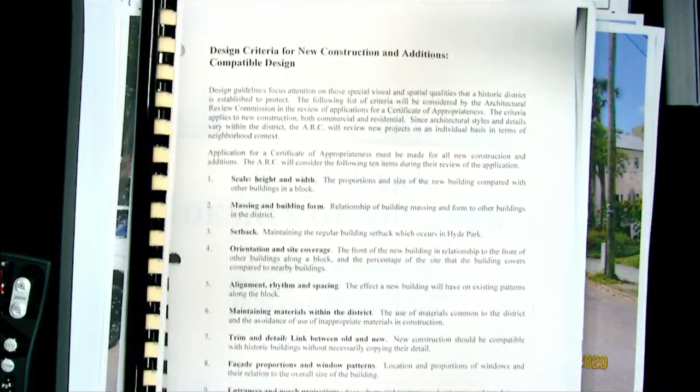These are the criteria for compatible design also. There are 10 criteria here, and these are also reflected in your staff report. The agent, in working with staff, will go through each of these items this evening. At this time, I'll delegate it to the agent.

Good evening. My name is John Keener with Keener Architecture. I'm the agent this evening, acting on behalf of the owners. We are presenting a case for a redesigned certificate of appropriateness for the house at 1103 South Rome.

Thank you for your time this evening. The house that we are presenting to you is a contemporary style. What we hope to demonstrate in the presentation this evening is that we do meet the criteria of the Hyde Park design guidelines.

We took the design that was denied with the variances, and we tucked and pulled and redesigned the front facade so that we could comply with all of the zoning criteria, so we're not requesting any variances this evening. One of the major changes from the previous design that you guys saw in June is that we took away the porte-cochere and we redesigned the front roof.

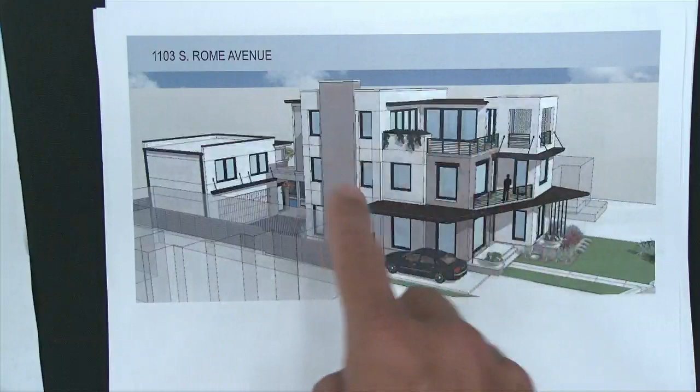Coming to the south, so you're looking towards the north. It is a 3-story structure in places, but it steps up from the street into the larger massing inward on the site.

This is looking at the south elevation. This is a view of the two-story accessory structure in the rear. It's not 2-story as far as actual living level, it's just a 2-story volume, so we can use it for storage and vehicular parking.

This is looking towards the southern, or looking to the south, of the northern elevations. Again, the northeast corner, in the front of the home. Again, a lower human view from the street, and then looking directly at the house from the front.

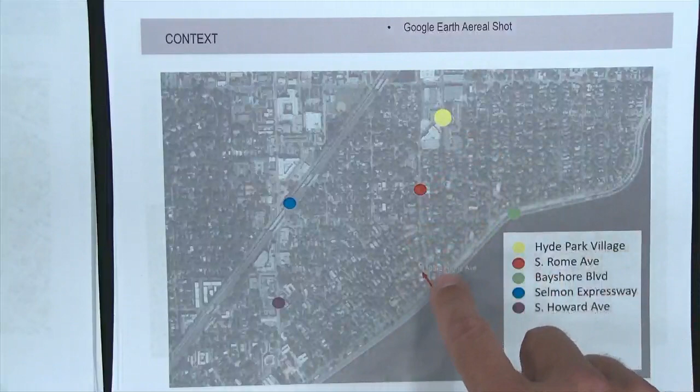As Ron had pointed out, the site is located along Rome Avenue. According to the Sanborn map, there are no contributing structures to the property, as well as to the property to the north and south. Just for context, our property is located closer to Bayshore Boulevard. Hyde Park Village is to the north, along Rome Avenue, near the Selmon Expressway and South Howard Avenue.

Looking towards Bayshore from the center of Rome in front of our house, and looking north towards Hyde Park Village.

The property to the north of us is a non-contributing ranch house with about a 35-foot front setback because of the large tree in front. The remainder of the homes along Rome Avenue have a 25-foot front setback. Our new design now has a 25-foot front setback, so we're observing that standard.

This is the property to the south. It's a postmodern style, approved, as Ron said, in 2000.

This is a newer construction, just completed at the beginning of this year at 1107 South Rome. This was presented as a contemporary design. Things to note are that it has plinths that project out in front of the 25-foot front setback for a front porch, as well as the 3-story element along Rome Avenue.

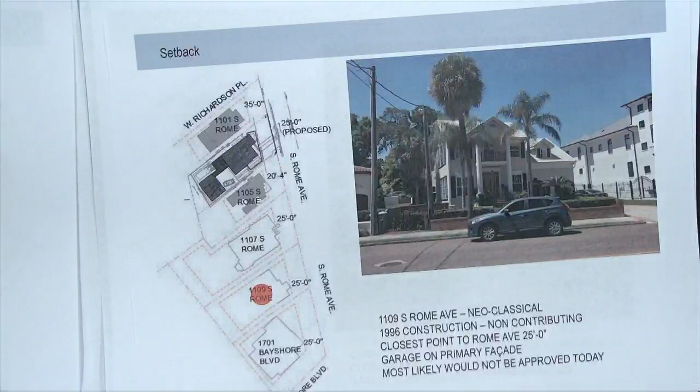To the south of that, at 1109 South Rome, there's a neoclassical, newer construction with a front-facing garage. Then along Bayshore Boulevard and Rome Avenue, there's a large Mediterranean Revival style home, which also has a 3-story volume on the front facade.

The purpose of presenting those to you is not only to show a variety of home styles along Rome Avenue, but also to reinforce that there is a larger scale along Rome Avenue. I think the homes and the massing tend to grow a bit. It's not the traditional bungalow street of Hyde Park. Rome Avenue, starting with Hyde Park Village, has modern style, very traditional styles, and newer construction—it's not the typical street frontage.

One of the important things when addressing scale and massing is to look at that facade. Starting at the corner of Hills and Rome Avenue, there's a relatively newer construction, 4-story multifamily project. Across the street, on 1011 South Rome, there's a 2.5-story structure.

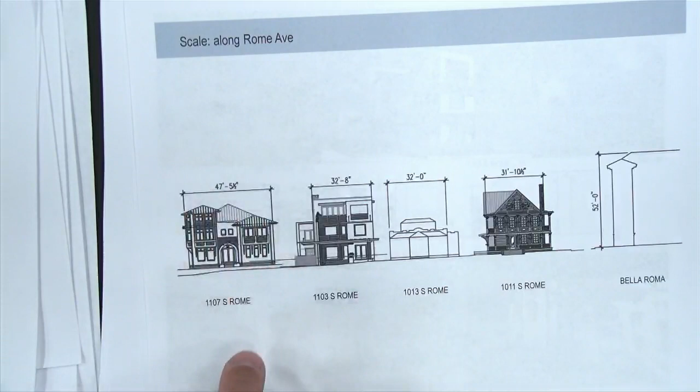It's a Victorian-style structure. To the south of that is a one-story Mediterranean Revival style—well, actually two-story, but one story in the front. The project we're proposing today has a three-story massing in the front, but is a two-story mass that steps back to the three-story. 1107 South Rome is a large new construction with three-story massing in the front.

I thought this is one of the more important slides to show that context together. It really helps emphasize that there's a variation of styles and sort of an eclectic nature of architecture along Rome, as well as fairly tall massing.

Here are some examples that have been approved in Hyde Park of other contemporary construction. These are all newer, within the last 20 years, but show a very similar style that has been approved in the past. I think they enhance the neighborhood—I don't think they take anything away from the style of homes traditionally found in Hyde Park.

Albeit this is a commercial structure in Hyde Park, it has a similar style to what we're presenting—clean white stucco, metal detailing, and taller volumes addressing the street. Hyde Park Village, north on Rome Avenue, really sets the tone for contemporary style. This has all been renovated fairly recently, and I think it shows that contemporary construction is compatible with the fabric of Hyde Park.

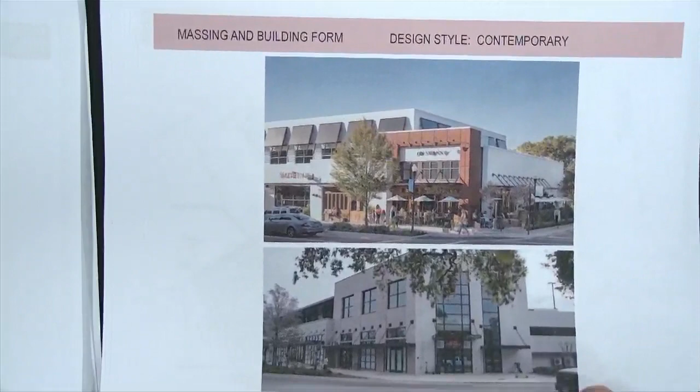More specifically to our site, we did request a design exception earlier in the year for a 1-foot side setback reduction on the north facade. The purpose of that request was to push the house to the north in order to allow enough room for a drive aisle to the rear detached accessory structure.

We're proposing an attached, open covered walkway between the garage and the rear porch to provide shelter during rainstorms—summer rains are tough to deal with if you have groceries. We have a ribbon drive that comes in with a concrete apron and small landing spot, then continues into a rear motor court that enters the 2-car garage.

The first floor plan has a ribbon drive and a smaller front porch than we presented at the last case, but we were very cognizant to make sure that we weren't asking for any variances.

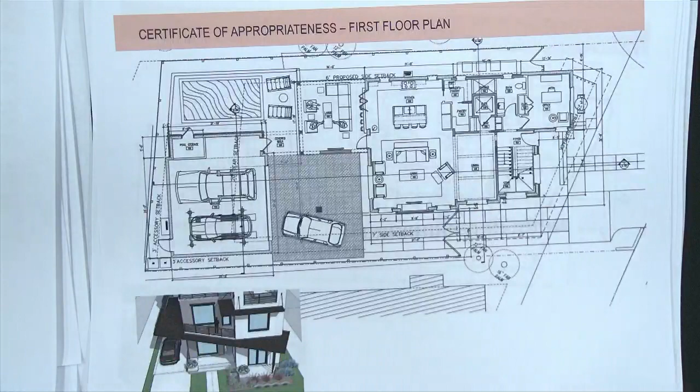We were also very adamant to respect this line, which shows the 20-foot building platted setback line that was discussed heavily at the variance meeting. We're well off of that line, so we're not encroaching with any roof overhangs or anything. Just wanted to make sure that was clear.

The second floor has a new metal canopy that extends out as a roof overhang. We have a small Juliet-style balcony off the bedroom, but that's really just a smaller landing spot than what we showed in the previous design.

The third floor is split between the master suite and some roof terraces. We have a covered portion towards the front that is a 3-story mass, but the remainder of the third floor is terrace and master suite.

This is a roof plan. We're showing a mixture of low-slope metal roofing as well as a membrane roof system. The front porch on the terrace level will have a low-slope membrane roof, stepping down to a metal low-slope roof. Then we have a parapet-style construction with a membrane roof, and on the rear portion a hip-style low-slope roof. On the garage, similarly, a parapet style with membrane roofing and a pitched metal roof.

The front and rear elevations are easier to read in 3 dimensions, which is why I presented that first. You can see the massing shows an average site grade of 8.5 feet, averaged between a higher grade in the rear of almost 10 feet 8 inches, to closer to 6.5 feet at the street. So we average it out to about 8.5 feet for an average grade.

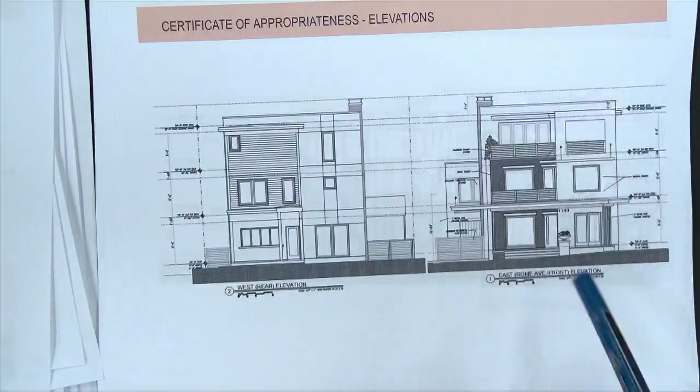As shown, the top of our roof, the roof deck, is at the 35-foot buildable maximum level. It steps down in some areas, and we have a parapet wall feature that extends beyond that by 18 inches. That's considered an architectural feature, just to give a variation of mass. So the actual top of roof meets the zoning criteria, and architectural features are allowed to go beyond that up to 40 feet.

In our case, as the property slopes towards the rear, it benefits us — the massing of our project actually comes down. So at the front we're meeting the 35-foot criteria, and as it goes to the rear we're actually slightly lower than 35 feet if measured from grade.

This is the north elevation. We're showing a mixture of materials. On the accessory structure, we're at the 22.5-foot height limit approved in design exception 1. We have a brick facade, which we'll show examples of as the presentation goes on, Hardie board siding with a 6-inch exposure and smooth finish, and again a low-slope aluminum roofing.

This element has Hardie board siding, and we're going to do a smooth stucco. Some of these lines show control joints with an aluminum window system, and again a brick facade that steps in. We'll have our mechanical units on a plinth below at the flood elevation, but behind the fence — we'll show that further on in the presentation. This will be a stucco element as well, with an architectural screen block, which we'll show examples of as the presentation continues.

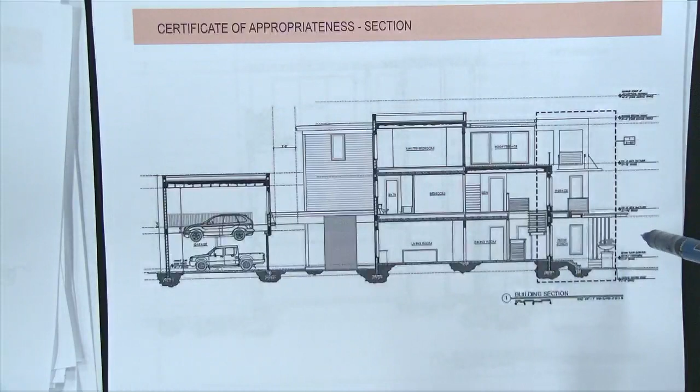This is a section showing how the massing steps from the front facade. We have a 3-story element, then the roof terrace, and the larger 3-story massing towards the rear. This is a cross section cut through that secondary massing.

It's through the roof element here and the planter. So it shows the extension of the metal canopy to the side, the brick elements, the planter, and the roof terrace.

This is the section cut through the accessory structure, showing the storage loft and then the vehicular lift.

We were requested to present a water table detail when we worked with staff. This is the two different conditions of where we have a water table line at the first floor level. Where we have stucco shown, we're going to do a 1-inch reglet detail to provide a reveal. And then where we have brick that continues down to the grade, we're going to do a 1/2-inch step out of the brick to achieve the line at the water table.

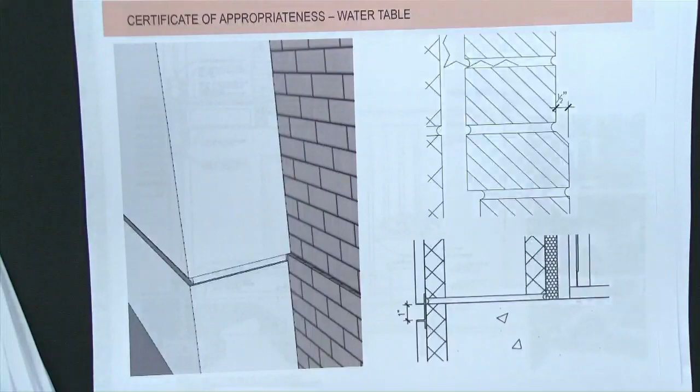This is a section through the front porch. We're showing a 22.5-inch step up from the sidewalk to the front porch, and then a 4-inch step up into the house. This also shows the relationship of the small balcony on the second floor to the metal canopy that extends out over the front porch.

Beyond, we are showing some 3-inch metal steel pipes. Again, we'll address that as the presentation continues.

This is a section cut through the third floor terrace showing the metal railing detail, how we're addressing the brick and the stone. Above all of the details where we have a brick condition, over the windows we're providing a metal channel that will be painted bronze to match the windows, and that channel will support the structure instead of doing header brick.

Typical details through the accessory structure roof conditions, where we have a parapet wall that goes down to a low slope metal roof. We're showing a membrane roof that slopes to the side, and then the metal roof at the parapet condition, and then here's the roof overhang detail at the accessory structure.

We're going to do a beadboard soffit, an aluminum wrapped fascia, and a low slope metal roof with an 18-inch overhang. We're also showing aluminum gutters on the roof that will tie into aluminum downspouts.

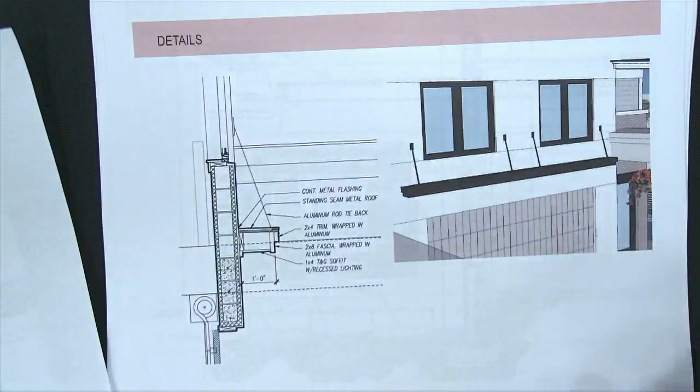How am I doing on time? Is there a time? Do we know? 12 minutes left? Thank you.

This is a section through the side canopy structure. We're showing a vehicular gate, the ribbon driveway, part of our drainage system, and then this is part of the stucco wall. We're also doing a tongue and groove beadboard soffit underneath the metal canopy.

Section cut through the planter detail on the third floor terrace.

This is a section showing how we're addressing the relationship of the condensing units on the north side. We're just building a metal plinth, and then we're also doing a 6-foot wood fence that has 1x4s horizontally screwed into the 4x4 framing members. So at no point from the front or north side will you see the condensing units from the street.

This is a typical roof overhang in the areas where we do have a low slope metal roof, 18 inches with a gutter and a 2x8 fascia clad in aluminum. At areas where we have brick, we're going to do a precast sill piece around the windowsill.

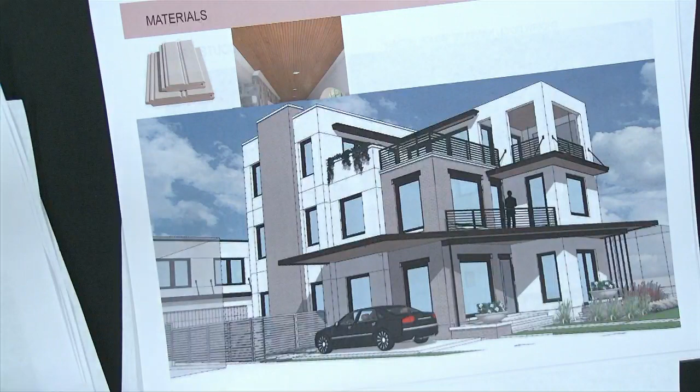This is an example of a similar color that we're proposing. It's going to be a lighter stained wood.

This is an example of the brick and the stucco that we're proposing. The stucco will be a white, smooth painted stucco. And then we're going to do a Roman style brick. We're still trying to narrow down the exact color, but we're proposing, I have an example.

We're proposing a beige tone.

Do I show this on the projector or just hold it up? It'll be fine. Okay.

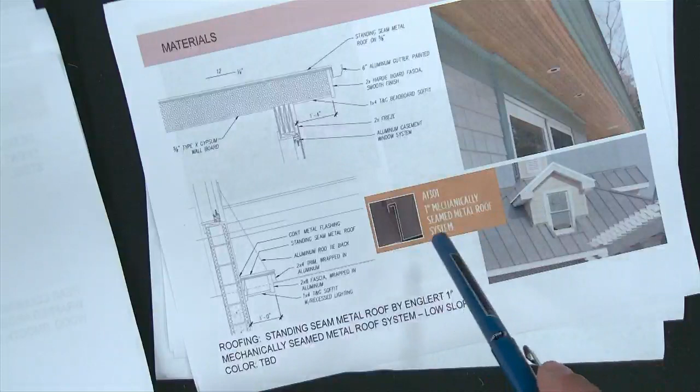I mentioned some of the roof elements. Where we have the standing seam metal roof, we're going to do a 1-inch mechanically seamed roofing system that's allowed to be put on a low slope. And what we're showing here is also just how those metal elements and the wood kind of come together.

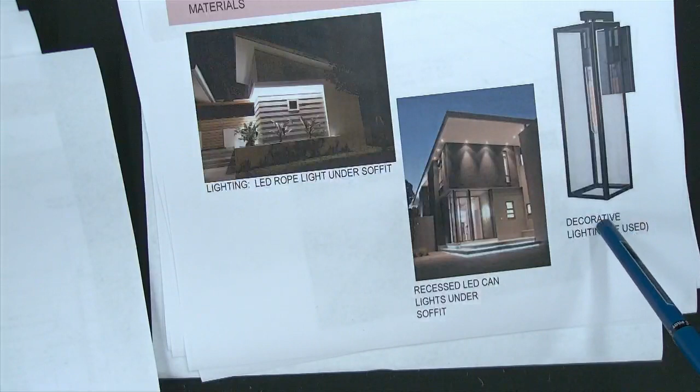For lighting, ideally we're not going to have any light fixtures on this house. If we do, it will be in this nature. Most of our exterior lighting will be via LED rope lighting or can lights, so we probably are not going to have any mounted fixtures, but we wanted to show an example of what it would look like if we do.

Example, again, of a detail through our roof system, and then just an example of a low slope membrane type of roof that we're proposing.

For windows, we're proposing to use an aluminum window system, very contemporary, by ES Windows. I think this one's a little too large to put in the projector, but it's a very clean aluminum style window. This is a smaller cut section through a casement piece. The majority of our windows will be casement or fixed.

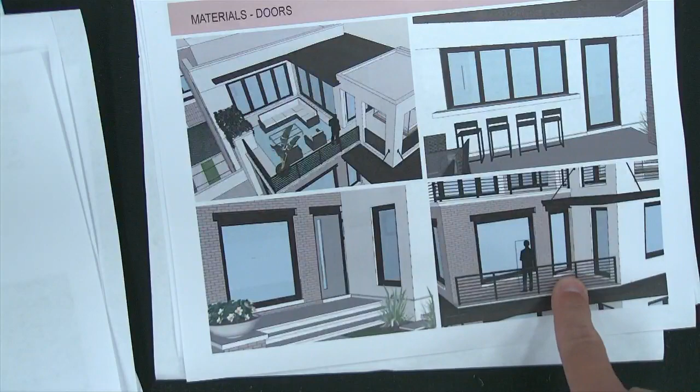For doors, we're showing a bifold door system in some areas. On the front door, we're doing a steel door, and in other areas we're just doing a French aluminum door system. These are areas where we're going to have doors on the front terrace, coming out of the kitchen to the rear lanai, the front door, and one little man door, a French door on the 2nd floor balcony - one coming out from both areas.

Our railings are going to be a very simple black aluminum. We're going to do a very thin flat stock metal, and it's going to be painted bronze to match the windows and other trim.

For the garage doors, we're going to do a clad wood, stained similar to the other trim, very light colored stain.

Mentioned earlier, we're doing a mixture of horizontal siding, brick, and stucco. In areas where we're doing the siding, it's going to be a Hardie 6-inch exposure with the smooth finish. Just an example of other contemporary architecture that has that style. This is a house around the corner, new construction, obviously traditional style, but it has smooth 6-inch exposure Hardie as well.

The front of Rome Avenue, many of the newer houses, a lot of the older houses have a retaining wall. We're going to propose up to a 12-inch high retaining wall along the sidewalk. I say up to 12 because that's going to be the highest point - it sort of slopes with the grade along Rome.

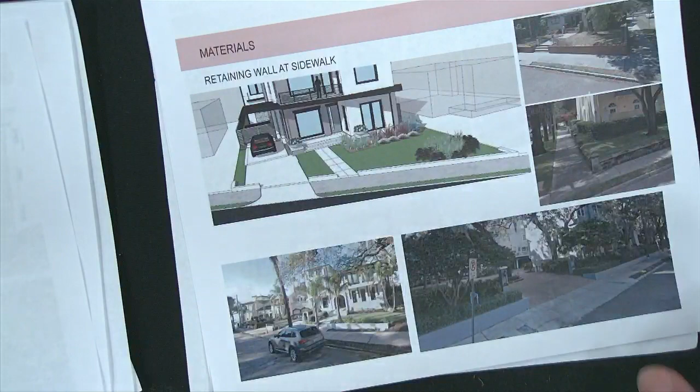We're still working, and as we get final construction drawings done, our intent is to keep it a rather low retaining wall, less than 12 inches, but we need to work with staff as that develops and we get our final grading plan complete, if that's approved. Again, this is just showing examples along Rome Avenue of retaining walls.

Our motor court, we're using turf block to help with the impervious surfaces, and also because it adds more green space, more play area. As mentioned earlier regarding the retention plan, we are draining all of our gutters into a downspout system that's carried out towards bubbler boxes on the street, so drainage is accounted for in all areas. And again, this is the front of our house as proposed.

We really appreciate your time this evening. We've worked hard with staff to try and present something that we hope can get approved and considered this evening. It's been a long journey for us - we started this application process in January, so we're really hoping for positive feedback this evening and some consideration, and we'd love to work with you and hear what you have to say.

Thank you. At this point, staff's going to present the staff report.

Good evening, Commissioners. Ron Vila, staff with Historic Preservation. Staff finds that this is consistent with the Hyde Park design guidelines. Initially, we started with the owners and the architect for him to define the style of architecture, and then once he defines the style, to stay within that vocabulary and move forward.

It's a very complete presentation this evening. And he addressed the items in your staff report on page 3, which deal with the scale and the massing, and for compatible new construction within the Hyde Park Historic District.

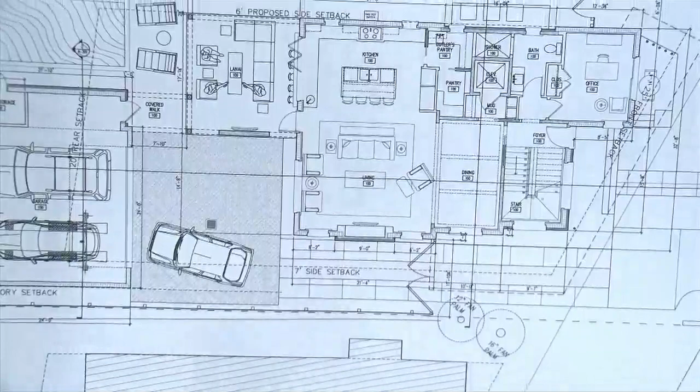So forgive my printing, but that's the line showing the separation between the two, and it's actually 5 foot 0.5 inches. So that's what we're doing to maintain the separation requirement. Cutting through here, this is a portion where we're going to have the membrane roof. You see it here and here. It's just an open connection, really just a roof and a beam that matches the rest of the lanai.

Okay, thank you. Other concerns - refresh my memory, I think the fence was brought up. Yeah, the fence, I believe you described it, but I don't think we saw a picture of it.

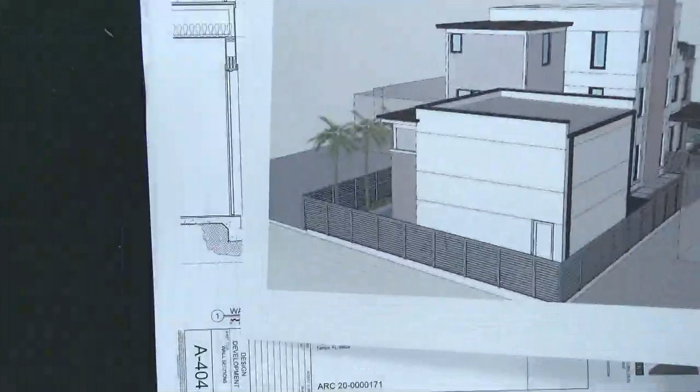So this is a typical section. We're going to do a 6-foot high wood fence. It's going to have a cap across the entire length, and then 1x4 horizontal slats with a 1-inch space between them. The model doesn't fully represent the detail, but it's very similar in nature to what we're showing on the model.

Okay, thank you. What were the other concerns? The last thing was the front walkway. I'm going to again reference the wall section through the front. So we're doing a concrete sidewalk from the existing sidewalk to the front porch that slopes slightly up. We're going to do covered concrete steps and an exposed concrete finish on the front porch, as well as the small porch off of the front office.

The majority of that front porch is clad with brick. In front of the office there are stucco details, so I think the question was how does the material engage the rest of the facade. So it's concrete transitioning into brick. Thank you.

So, on the graphic for the fence and the gate, they both kind of look like they're metal, but you're saying they're wood? Yeah, it's just the appearance on the graphic. Yes, ma'am, it's going to be a painted fence as well, so it's just the appearance.

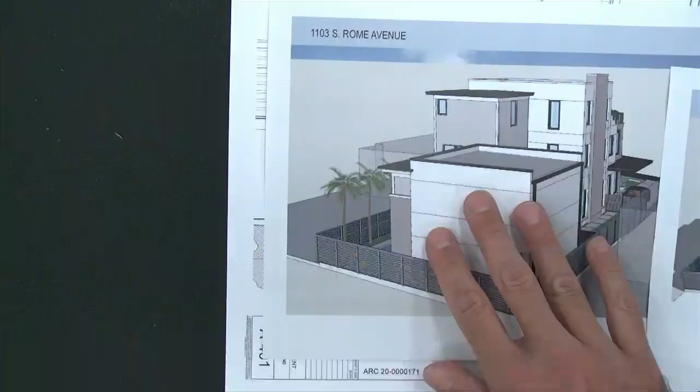I guess, to the accessory structure, if we can pull up the rear view and side view - I think that's the south view. No, that'd be east and west. So this is the rear view the gentleman was concerned about that faces his property, and then the other side as well. So was there a reason why, since you're very deliberate on other parts of the house switching up different materials, you kept this more just one stucco material on both sides with no windows?

Honestly, I thought more in respecting the neighbors. I didn't think they'd want windows looking into their yard, even though there's no function of that space, it's just volume. So we didn't see a need to place windows there. We'd certainly be happy to entertain doing that, but that is the rear back corner of the lot. There is no alley, no really visible angle, with the exception of neighbors. But in our defense, there is no other place to put a garage on this site.

We're not allowed to put it along the front, so it really leaves one of those corners. The massing was approved with a design exception that allows us to go to 22.5 feet, and there was the ability for public comment when we applied for that, and we didn't hear anything. So we were fully compliant. But we're more than happy to work with staff and the board if there are concessions we can make to make it more neighbor friendly. Yeah, but it's really just a matter of function—it's expensive to place windows in an area where it's not functional.

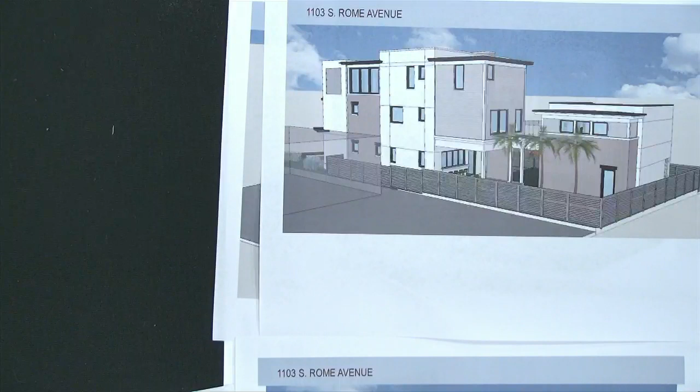Are there no mullions or muntins in any of your windows? Are they proposed? Okay, so are they operable? The larger windows are fixed. As we go around the facade, there's going to be a mixture depending on the function—fixed windows versus casement. Where we do have fixed windows, we're going to do a fixed casement so it has the same profile as the other windows, so there shouldn't be a big drop-off in look. But to answer your question, the larger windows are going to be fixed. Some of the other windows will be operable because they're acting as egress windows, so it's a mixture of the two.

My only other question is, you were very diligent in sharing the design comparisons of the district. Do you have any information on site coverage for the district or your area? I don't have specific numbers related to other properties. I do know the houses to the north and south of us are smaller ranch houses like the one we're demolishing, and I don't think it's fair to compare new construction with those examples. However, on a lot of the historic projects I work on—especially one along Hills Avenue—we're often exceeding the 50% requirement. I also worked on a property at 1011 South Rome, where we worked with the city to provide an underground containment system similar to what we're proposing here. That property actually had a worse case than this current house, so it's fairly normal to exceed the 50% requirement on larger, older houses in Hyde Park.

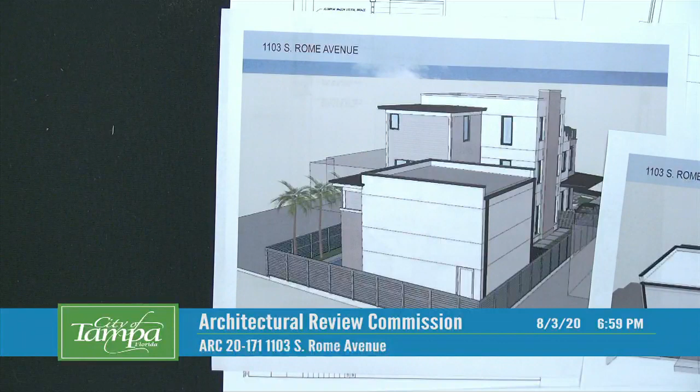Any further comments? Not from me, thank you, sir. Then at this point, the applicant is allowed 5 minutes for a rebuttal.

I think what I would like to just say is that I appreciate your feedback, and I think that we would hope that with our relationship working with staff, that some of these accessory structure items might be able to be resolved outside of coming back before the board. I think you've made very clear the comments, and we can certainly respect our neighbors and would be very open to including additional details to that.

Obviously, I request that we could work with staff on that, but I think that we don't have any fundamental issue with addressing those concerns. I think that the accessory structure was designed to be simpler, and staff even mentioned that we might have some concern with that back and side elevation of the accessory structure. We didn't choose to ignore that, but also thought that we'd present the more simple version of this. And hearing your comments, I think we probably made the wrong decision. But in fairness, we do respect that, and we would be happy to address those comments.

Thank you. At this point, we will be closing this portion of the public hearing, and the commissioners will now begin to discuss the case. Would the commissioner like to start? Neither. Commissioner Sutton, I'm going to cut to the quick.

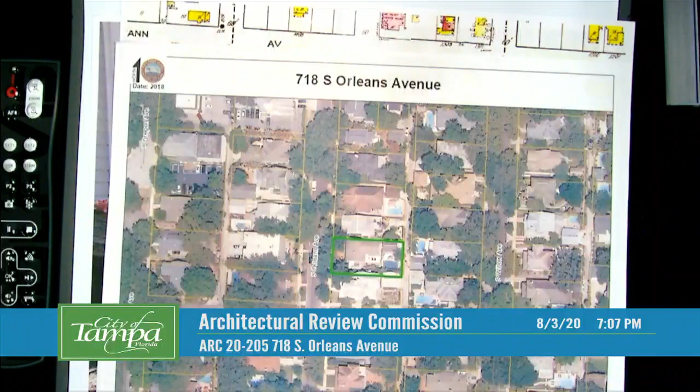This is looking at the front elevation of that contributing structure. Just looking from the side, from the driveway side. A little closer to the stoop as you approach the front door. The brick material. The front door itself. The lap siding. And these are the windows on that front facade. They're multi-pane over multi-pane, double hung. These are the casement windows that flank the front door to the north. And just to conclude is the overhang and how that Dutch style roof terminates.

I just wanted to focus on the front porch since this was the extent of the request tonight, and I'll hand it over to the agent.

Thanks, Ron. Good evening, Commissioners. Tyler Hudson, 400 North Ashley Drive, the agent for Jeff and Kelly Halpern. With me tonight is Kelly Halpern, who's one of the property owners. Jeff cannot be here. He is with the Lightning in the NHL bubble in Toronto. The Lightning just won in overtime, as a side note. Part of the project team is here, though, Alan Dobbs, who is the project designer.

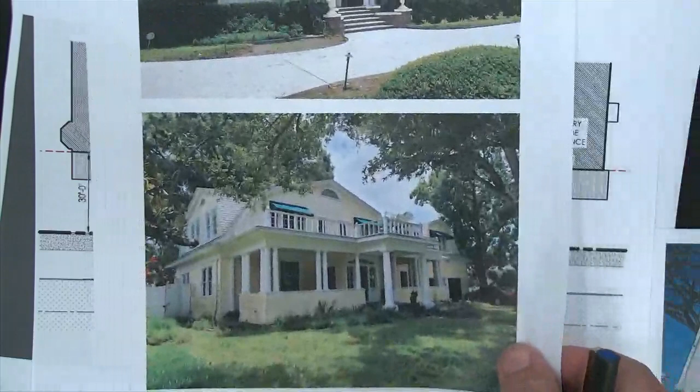There's another example, and notice that it's not just one plane for the porch - it actually projects out in the middle, which is actually one of the alternatives that we had kind of looked at.

Y'all still working on the microphone? Oh, okay. Now I don't have to stretch as much.

This house is actually one street over, and this is probably the closest Dutch colonial house to this property, and it's also the closest in the design of the porch. You can see it's not as wide as our house, but you can see how the roof is with the body of the house. The dormer is not quite full width, and also the regulating lines weren't maintained here and here, which is a little atypical.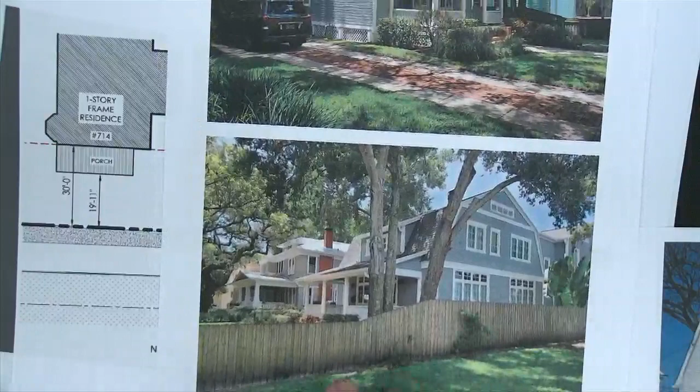But it does show you the front porch, and it aligns with this porch next door. I'm going to show you real quickly before and after, show you our design solution, then show you how we arrived at it.

This is the existing house. You can see the roof, and it has some pilasters and some nice corbelled brackets. So that's a very important character defining feature, but there's really no way to do a porch without concealing that or removing it. So we're basically going to conceal it, but we're going to remove the brackets and reuse them, which I'll show you.

And then this is our design solution. You can see that roof form has been recreated there. The brackets are there, even the same light is there. You can see the regulating lines continue all the way around.

This is just a couple other views a little further out and a little closer up so that you can see the underside of the roof deck. The columns are paneled. The beam is the same width as the columns, and the underside is paneled. And then we have that, which has beadboard, which I'll show you in the details. Again, that matches existing. And then the porch.

I'm proposing to my clients that they use robin egg blue. That's a very common historical color for porches. And by the way, these little cheek walls on either side of the stairs are all original, and they pretty much line up with the front door.

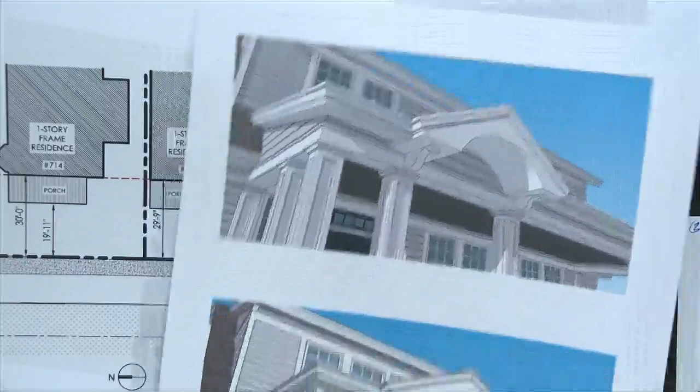I forgot I had a little better close-up detail of the front porch. And then there's the existing, so these brackets are what we're gonna reuse. And because this is all the underside of the soffit, which is basically our ceiling, all of this can remain, and we can just literally frame around it.

One of the unfortunate things that we're going to have to modify, just because of the geometry of the porch, is the edge of the porch is here. So when that beam comes back, it's going to be right over this window. So we are going to modify this window to basically be half the size, and I will point that out. That's one of the unfortunate things, but there's just no way around it.

Some of the other details on the house that we looked at is on the back. I don't know if you noticed the one-story element on the side of this house had this kind of railing detail, which they reused in the back of the house. This was an addition that was done about 10 or 15 years ago, and it has a screen porch in the back. You can kind of see that railing with the cross here, but then this has just more simple vertical pickets.

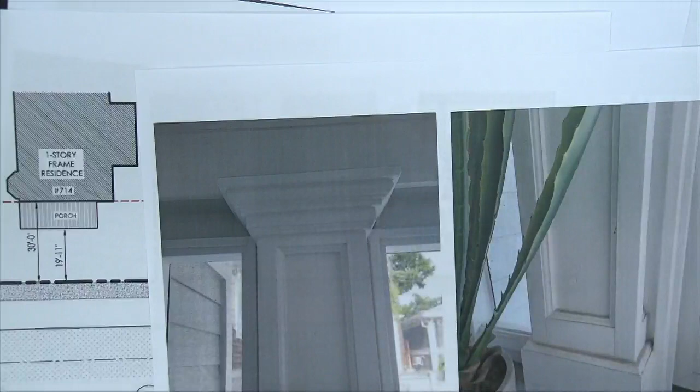And then in the back, the columns - I showed the whole full height column, you lost the details. So it's a fairly elaborate detail with the paneled column and elaborate capital. And then the base is a little more simple base, but you can see the stiles and rails are all well proportioned on the columns. And then maybe if we can zoom out a little bit.

Okay, so basically this is just the existing front elevation. You can see the door is not centered. That's that window. When you go in the front door, this is where the stairs are. So this is really a feature window, so it's going to remain a feature window, just altered in size. And then this is what's existing. It's all red brick right now.

So these are some various options. I think it's important to understand the process because, as I talked about before, there's no best or perfect solution, but there's an appropriate solution. So we have to design something that the Halperns will be happy with.

So we looked at several different options, and this is a series where we showed the front porch bumping out a little bit and recreating the roof. These are round, classical Tuscan-style columns that have entasis. That's a very common column for this type of porch. They did not care for the round column, so that's why we didn't do that option.

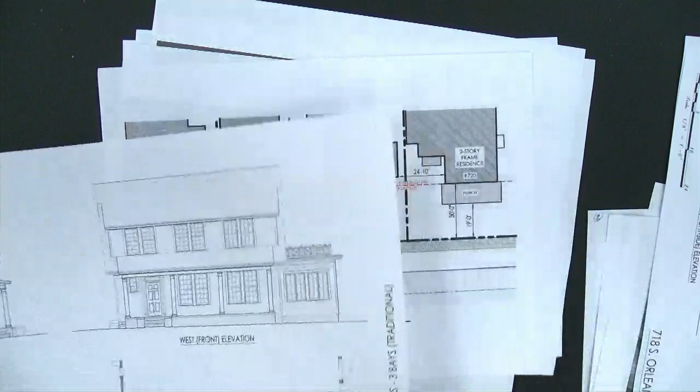Because as you saw before, 4 columns creating 3 equal bays was very common, but it was also common to have columns not necessarily equally spaced, as in that one example I showed you. But this particular example shows 4 equal columns, simple shed roof, the most simplistic. But Jeff Halpern felt, with this house in this neighborhood and their taste, they wanted something with a little more detail, a little more character, which is actually part of the Secretary standards and the Hyde Park design guidelines.

So this is another one where they were considering putting a railing on the porch. They were going back and forth on that, so we decided we're not going to do a front porch railing, but we looked at the option of how we would do it and how that would work with the architecture of the house.

And then this is the design that we pretty much ended up with initially. It has the square columns. The columns, if you can see a little detail, have a panel to them. We have the corbelled brackets here, and we have the recreated roof there.

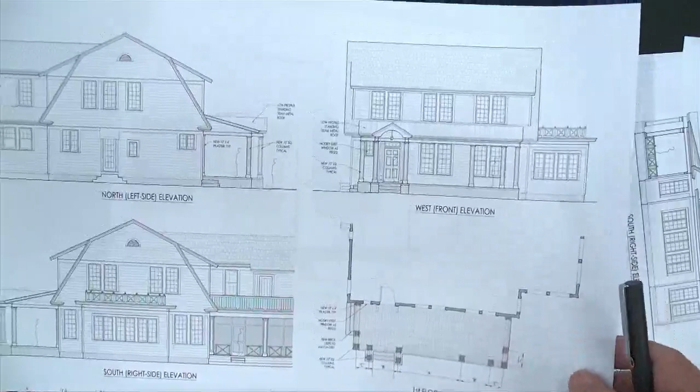And the problem with this was getting back to the variance. I think it was noticed at 17 feet, and that was with doing these columns out here. After talking to Lee Wilson Rasaji, who lives next door, who's an architect, she said she liked everything about this but had a problem with that, which I agreed with. I felt like we can make the case for having this all in the plane, because that does project beyond the 19 feet.

So in the site plan, what I did—these next series of drawings are basically what you have in your packet, the drawings we submitted—but because the resolution's so low, I just printed them up a little larger so you could see them better. They look a little better on this too.

So these are basically the ribbon driveway, which is going to be redone. There's a brick path here now; it'll probably be redone along with the new brick path here. We're going to create some new wider steps here, because that's primarily where they're going to park and enter. You can see the columns here were removed, so we just have the columns along here, and then there's sort of an odd apron here.

We can't project past the projected property line, so that's the way this is configured, and we're just going to recreate it because it's all broken up right now.

So let me talk about the rhythm of the columns. Doing the 4 columns equally spaced worked well, but it didn't work well with having the door and these steps centered on one of the bays that was off-centered. So I looked at different column configurations.

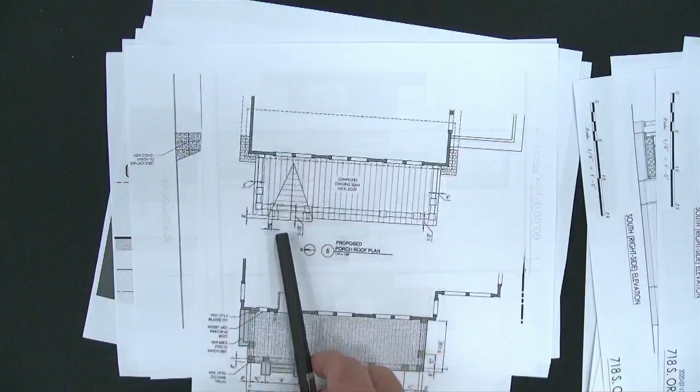As far as the roof plan, we are proposing a low-profile standing seam roof because this is a secondary roof feature, and we want to differentiate it from the existing. It's a very common treatment as an accent roof material, so we have that all the way across here. And because this roof is steeper, that's why you have that particular angle there.

The elevations—again, we have the paneled columns. I talked about this roof, you can see the standing seam roof here, and you can also see the spacing of the columns. Then you turn the corner over here, you have the stairs, and they cascade down on this side. And then we have a pilaster right here, which you can see with that half of the original window.

This is a typical detail through a column. On the base, this is existing platform, so we have a 7¼ inch base with the cove mold, and then we have this paneled stile and rail type panels for the column. The reason they're paneled too is because they're 10-inch columns. When you use a solid material at 10 inches, typically it looks better paneled, but it's also a functional requirement—if you get a 10-inch wide piece of wood, the chances are very high that it's going to check or crack. That's why you do the panel.

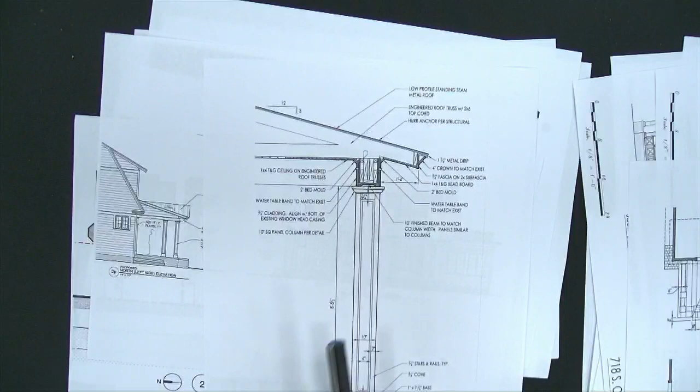The underside of the beam is paneled to match the panel on the columns. And the porch beam aligns with the house, which I forgot to mention—you can see the porch beam aligns with this horizontal member that goes, it's basically the head casing for all the windows on the first floor.

And it has a sloped soffit, because on the rake or gable ends, that soffit just continues on up. On the fascia here, it has a crown molding. Actually, I have a larger detail—I think I'll just go to that.

This shows it a little bit better. So you can see the paneled column, you have this water table, which is basically a transition here—that's a continuation of what's existing on the house. We have a bed molding here as a transition between the ceiling and soffit and the beam. Out here, we have a 2x subfascia and a 3/4 inch finished fascia with a 4-inch crown molding and a 1 3/4 inch drip.

That's one of the problems—actually, it's one of my pet peeves. These roofers will come in and do like a 2 3/4 or 3-inch drip edge, which hides most of this crown. That's a very important detail to keep like that.

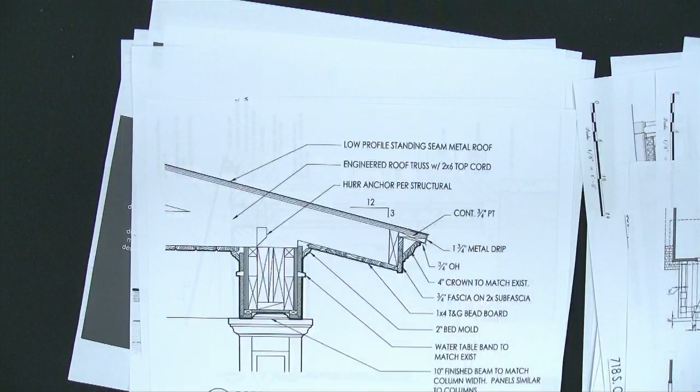And then we have the standing seam metal roof. On the gable or rake end of the porch, the beam basically has the same detail, except we have the finished wood lap siding that matches the existing, and then we have the bead board, which is oriented this way, and then the fascia and the molding there.

This detail is through the front gable. This is the bracket that we're going to very carefully take off the existing house and just relocate it here. These lines represent the arch, and then the light in the center of that arch. Again, the beam, and then this is going to be solid material, so I'm calling it out as cellular PVC—there's nothing in wood that we can do to get that solid. I'm concerned about using plywood, so that's why we're using that there. And then the same thing on this outer gable end, because we have that curved profile.

This detail was really just meant to show the column in a little more detail, because the dashed line is the structural column, and then you have the 7 1/4 base, and this creates the bottom panel, and then you have the base, and then the really small cove moldings, and then you have the crown at the top, which creates the capital on the column.

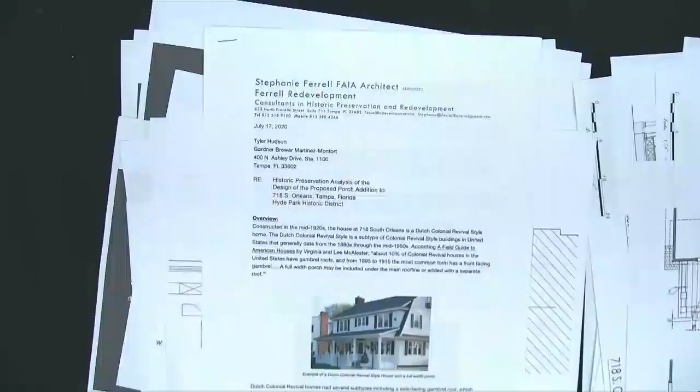Can you zoom in on that just a little? Yeah, thank you.

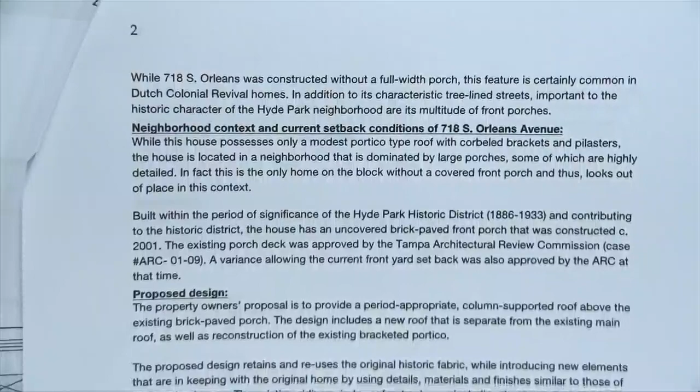Be nice to have some music to go with this. Sorry about the silence.

Okay, I think Tyler might have a few closing words here.

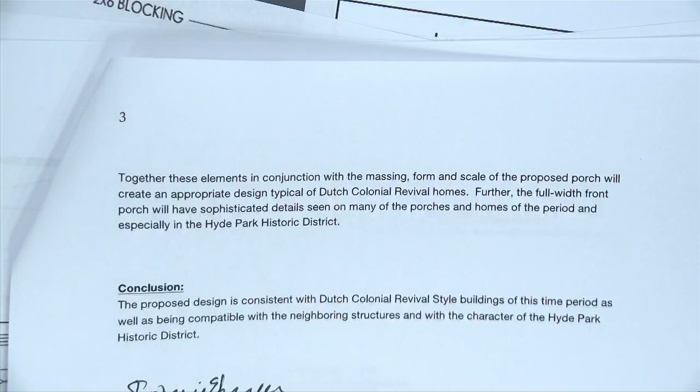Thanks, Alan. I don't really have any concluding remarks, we can handle that and any cleanup and rebuttal. But one point of information I did want to stress is the staff report was based on the original application, which was a setback reduction request from 25 feet to 17 feet. But based on the updated drawings, which I think Alan alluded to, we're actually just requesting 25 feet to 19 feet, which is consistent with what was granted back in December of 2000. So I just wanted to make that clear because I think I glossed over that a little bit. Thanks.

Thank you. At this point, staff will present the staff report. Staff would recommend that you focus all your questions on the variance portion at this time, and if the variance goes forward, then we could talk about the certificate of appropriateness.

Thank you. For this portion, we will open up to any public comment. This public comment, as staff has mentioned, is only regarding the variance, not the actual design or look of the building yet.

I'll start. Ordinarily, I'm not a big fan of variances. Hold on, commissioner, yeah, we're gonna have public comment first. Excuse me. Hi, how are you?

My name's Danae Williamson, and we own the house across the street from the Halperns. In addition to the house across the street, we own the house to the north of the Halperns where my mother-in-law lives. So I think that we're all in support of this, and I recognize that in 2019, the city of Tampa introduced a front porch initiative by Mr. Dingfelder. And as supportive neighbors, we have complete faith in the design that was just shown, that it will adhere to the stylistic guidelines and only enhance our block.

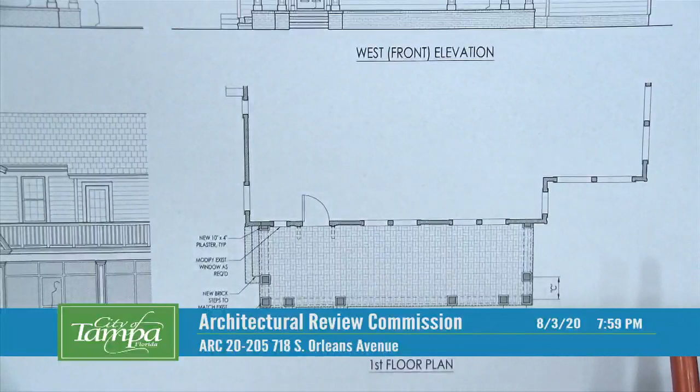The problem is supporting this beam, but also how does that beam tie into the existing structure? Normally it just dies into a wall and you don't have any opening below. Or more common is you have a pilaster, and so we're just going to do a pilaster here. That was the part, to be totally honest, that I struggled with the most, and I knew that the board would take issue with. But it kind of gets back to the Secretary of Interior standards that we just couldn't find any other reasonable alternative or solution to that, other than just keeping the one window there. So the intent is still there, still a small feature type window. But that's the best way I can answer the question.

Okay. And then also, in the staff comments, it speaks to the new additions and adjacent or related new construction will be undertaken in such a manner that, if removed in the future, the essential form and integrity of the historic property and its environment would not be impaired. Can you explain, if this were to be removed in the future, how the integrity of the facade would remain?

I'm glad you asked that, because that was a point that I wanted to make and I didn't have a blown-up detail of that. But this shows that, unfortunately it's very lightly screened, the existing roof comes down right here, and then it has the little molding. So basically, even though I'm showing trusses here, this whole roof structure can basically be built around this roof. I showed roof trusses, but it could very simply be conventionally framed with ceiling joists and then rafters, so that we can preserve that part of the roof.

And also where the little gable is, over the front, because that gable at the highest point is, well, this is similar to the existing, so it's not any higher than that, where that roof intersects the wall. And then, as I said before, these little brackets here, we're reusing those, we're just going to move them. Okay, thank you.

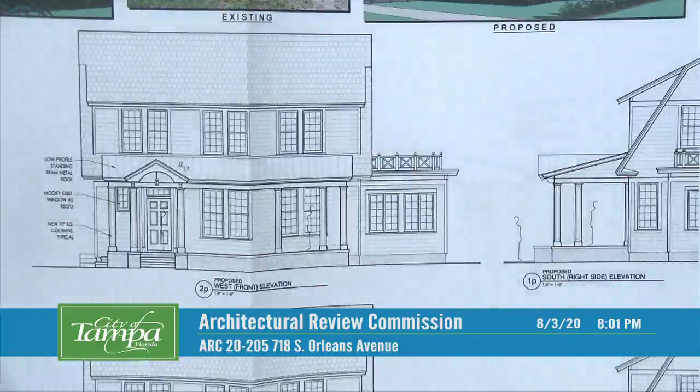Do you have any reference for the introduction of the new roof material to your addition?

No, I don't have any supporting documentation other than years of experience working in historic districts and neo-traditional type neighborhoods, where it's fairly common to have secondary roof features in metal or different contrasting material to differentiate that piece. I've had at least one project that came before this board.

It was a new home in Seminole Heights with a bay window in the back. It was a large, full-width gable, and there was a little bump out in the master bedroom with a shed roof. We used a contrasting material there because my client wanted to use copper.

The Halperns really wanted that, and it's by far the best kind of roof material you can use. It has the highest wind rating, especially a low-profile standing seam metal roof, with no exposed fasteners. I don't think any other kind of metal roof would be appropriate, especially a larger profile standing seam or a 5V crimp metal roof. Neither one of those would be appropriate.

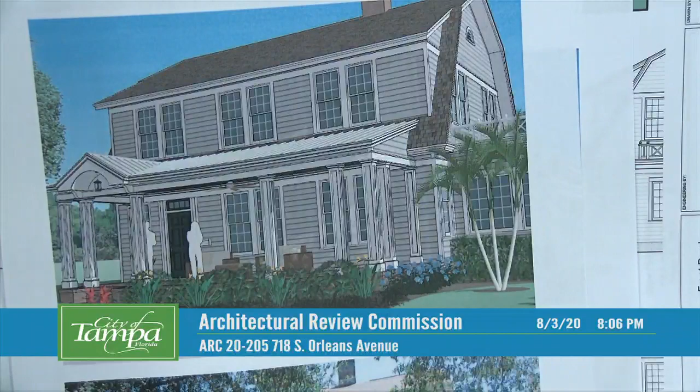Yeah, that was actually one of the ones I had shown when I took you through the process. It works, it's simple, but for a house with a lot of detail, my clients wanted more detail. Hyde Park has very detailed front porches, so we felt it would be more in keeping with the character of Hyde Park to have better details. That pediment roof is such an important character-defining feature, so that's one of the reasons we wanted to recreate it.

Here's what that looks like in 3D. It's very simple, and it gets back to what I was saying before: there's the perfect solution, the best solution, the appropriate solution. Different people may feel the simple roof is a better solution, but we feel they're both appropriate. In this case, because our clients and the neighborhood requested a more detailed front porch and more sense of entry over the steps, if you're going to do something different along the front of that porch, that's where you do it, over the steps, to give it a sense of entry.

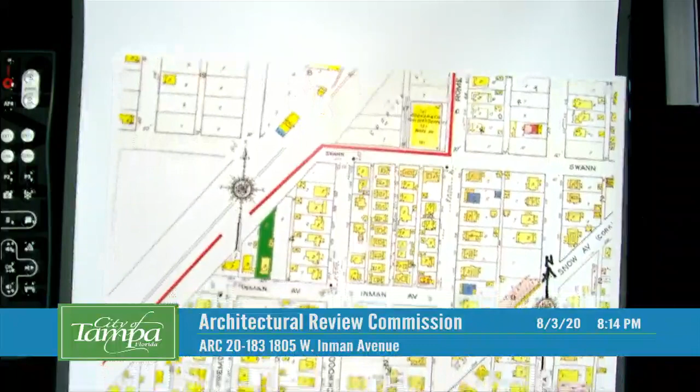This is for the address of 1805 West Inman Avenue. This is for a certificate of appropriateness for an addition, and there's also a variance attached to this request for a side yard setback from 7 to 0, on the west side. For simplicity moving forward, I'll open these together and have the agent do one presentation. There are 3 additions attached to this request. If the variance portion is not reviewed favorably, the other 2 could still move forward for the certificate of appropriateness, so a complete presentation would help us out with time.

Moving to the Sanborn map, this is from 1929. The property in question back in 1929 was a 1-story frame structure which faced Inman. To the rear you have the crosstown, which used to be the railroad track. North is facing up.

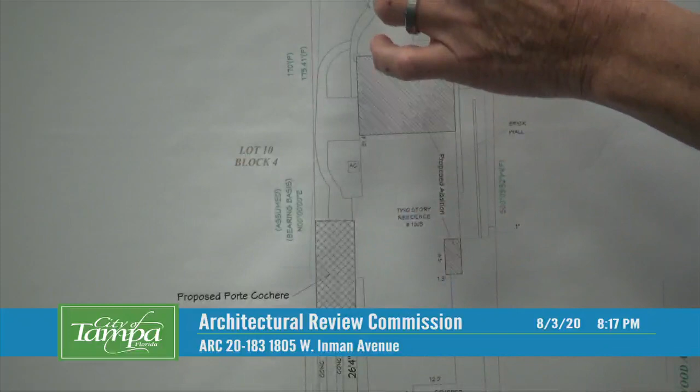So, anyways, site plan, as Mr. Vila explained, 3 additions, which is kind of a little bit misleading, but anyways, the variance is for the porte cochere, this area right here, which is at the end of the driveway. The unique part about this property is, and I'll show you on the floor plans later, when they built the addition, they squeezed the lot line so much that you can't actually get a car back to an accessory structure in the back. So they cannot have any type of covered parking on the property except for the porte cochere area that we're proposing.

This property has been added on a couple times, and I'll show you on the floor plans in a little bit how really just chunky and blocked up it is, and we're trying to rectify that. My company, we pride ourselves on doing additions so it doesn't look like an addition's been made, it looks like it's supposed to be there all along. So this addition back here in the rear is actually a porch area currently that we're going to cover and add a second story to. I'm sorry I brought big paper, I didn't realize I could make smaller stuff because this doesn't fit in my pocket very well.

Yeah, that's right, you probably can't see it very well on your screen. The green lines here are the existing house. This is the front of the house, and this is the rear. You can see that we're not increasing the actual footprint of the house on the first floor.

The addition is on the second story back here. That's going to go above this area right here. We're taking this area—if you can see this line, this is the kitchen currently—it bumps up, goes over, so on and so forth. We're just taking it and putting it on a straight line coming out and down to make that more uniform.

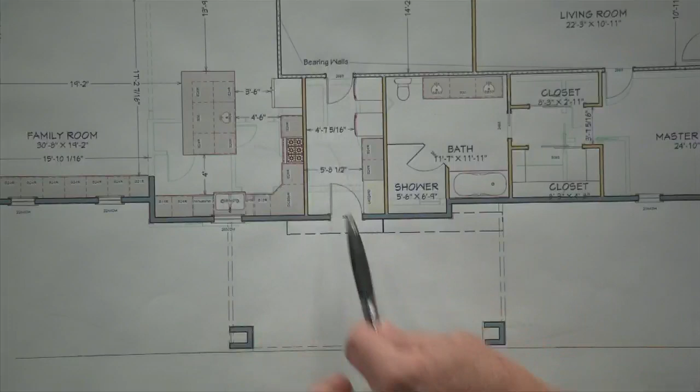Over here, where we're doing the porte cochere, you can see this exterior wall comes out, up, down, over, up, down, back. We're just making it one continuous exterior wall there, and then building the porte cochere so they can have some covered parking to get into the house itself. As we all know, Florida rains.

Some simple line drawings of what we're proposing. This gable on this end of the porte cochere—I'm not opposed to running it the opposite direction if that makes the staff and council members happier, we have no problem with that. But as you can see, it's simple; we're not changing any roof structure or roof materials.

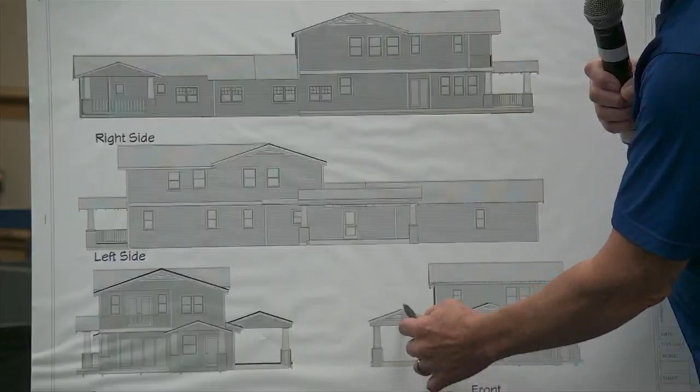We're sticking with shingles, we're sticking with 6-inch exposed lap siding. We're doing the exposed beams, the exposed rafters up top. Same column structures in the rear as on the front, same thing on the porte cochere. The vents will match, all the brackets will match, all the windows will match. It's all matching, because that's what we like to do.

This is our addition here that we're putting on upstairs. This is the patio that is currently there. All we're doing is covering this area and including this footprint vertically, then extending this wall straight across, as I have in all the dips and dives, and redoing the roof structure here that's got—I'll exaggerate and say 16 different roof structures, but really it's only 4.

God bless you, whoever that was.

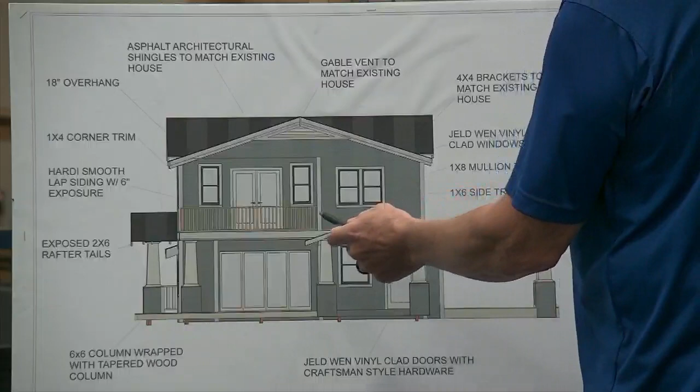So here we're basically calling out our materials: the 6-inch exposure lap siding, the 1x4 corner trim just like on the regular house, the gable vent that matches the architectural shingles, 18-inch overhangs, the 6x6 columns wrapped with tapered wood to match the rest of the house, and the Jeld-Wen vinyl clad doors and windows.

Basically, I made this same presentation about 3 months ago for a pool house on this same property and just kind of copied and pasted it. So sorry if I look lazy.

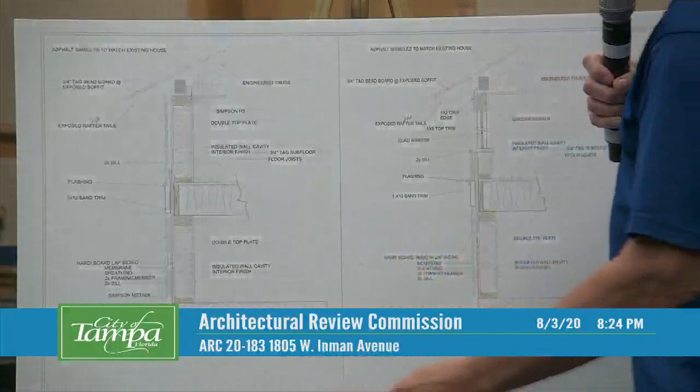In our wall sections, this shows the 1x10 band to break up some of the massing on the second story, the lap siding, the tongue and groove beadboard on the bottom side—not underneath, because we have those exposed rafter tails—to give the appearance of the old beadboard decking that runs all the way up the roof structure. And that's all the big pieces I have.

The client's big concern is going to be the porte cochere, the variance for the porte cochere. They're trying to just be able to get access to their home in a dry condition to unload their vehicles. They have 2 small children, and they're just trying to get into their house without walking in the rain.

Porte cochere here. They normally park their cars right here. Their front door is here, so they have to walk all the way around the front of their house to get inside. We're just trying to give them a dry access to their home to be able to load and unload.

And then the additions themselves are because they have elderly parents, and they believe that they're going to have their parents moving in with them in the next couple of years, so they want to add the additional space for their master bedroom. So that's really all I have.

Thank you very much. At this point, the staff will present the staff report for the variance. So at this time, I would have Mr. Jones focus on the variance request. He had submitted initial responses to us, and then I had asked him to provide additional information, which I believe is in your staff report on page 5. So Mr. Jones, if you could go through that criteria at this time.

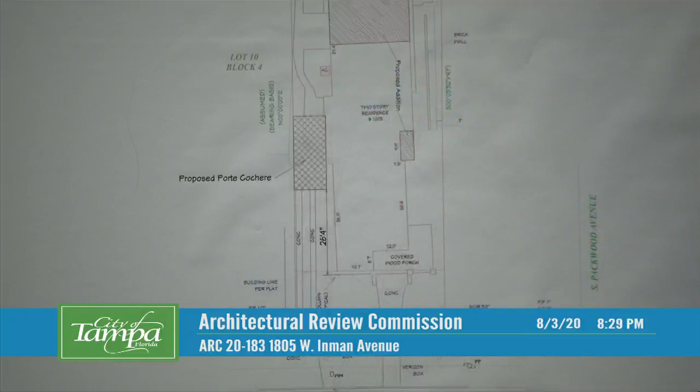So, moving to the rear of the property, you're showing all kinds of lines. So there's the AC unit, and the AC unit sits on grass? Yes, that's correct. And then, if we can pan up, yeah. The backyard is sort of, is that all grass? This is brick, and then this is a concrete walkway through here.

Okay, I don't have any additional questions. Do you have maybe a floor plan that has dimensions of that porte cochere? No, but I can tell you that it's 9 feet to outside. From the house to here is 9 feet, and from front to back is 25 feet.

Okay, so the intention really is, in the way it's designed right now, you couldn't move those columns in anymore because the car would basically... Okay, that is correct.

In other variances that I've gone through, not with the historics, just regular variances, I've gotten to a 0 lot line for my overhangs and eaves. So they normally let me, previously, a 6-inch setback for the columns, but a 0 setback for eaves and gutters to be able to get the water off the site.

There is currently no side entry to the house. That is correct. They're parking on the side and walking to the front of the house. That is correct, yes, ma'am.

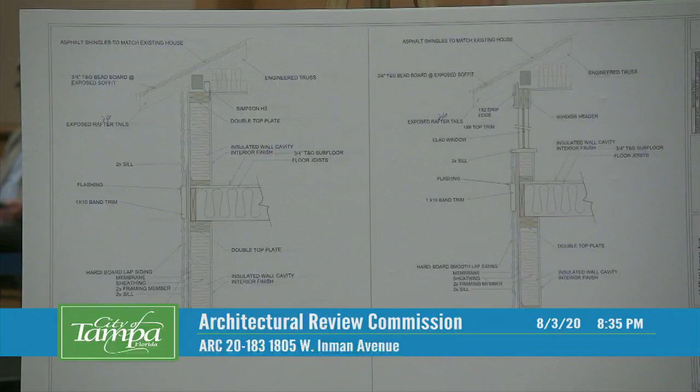Like I said, we have our 2x sill with our window details that all the trim matches. This is our existing, this is our proposed, to make sure all of our trims match.

Also, could you explain what kind of door is on the rear of the building that you're proposing? These 5 doors right here are the existing glass doors that are wood, and we're going to match them upstairs. Thank you. Is that the same condition for the new side door? That's correct, it's going to match the front. Yes, ma'am, sorry, yes, they're all glass slab doors.

Is the existing foundation enclosure and structure the same as what you presented in that previous wall sections? Yes, okay, yep, for the entire, yes. So basically, the existing addition, the 2-story appendage to the original building, the original bungalow, that is a slab on grade. That is correct. Thank you.

I do have a question, sir. If you could please, I see you've explained the doors to us. I see windows here that are shown on this elevation that are 1/1 pane, but you made a presentation of multi-pane windows, so that's the actual intent? It's happening, yes, it's happening right now, sorry, okay, yes, it's happening before our very eyes. Yes, thank you very much.

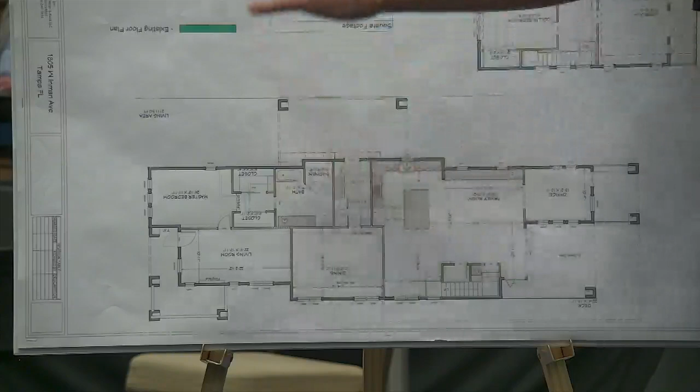Okay, so if you could go back to that 3D elevations and models that you have, the top right image. So you'll have the banding that kind of comes along the second floor. That's gonna die at the corner of the 2-story?

That's correct, yes. And then where does that 2-story corner piece terminate? So this is the existing house now. We're not going to do anything with this. This existing house stops right here. So we're just going to pick up that banding and go back and run around the backside.

So I guess my question is, and it might just be the way it's modeled, does that corner trim on the 2-story come down at all into the first level? No, it does not.

All right, so if you will not be adding that porte-cochere there, the only thing you're going to be doing is putting that door? No, this wall here gets rebuilt because right now it dives in 12 inches and then comes back out. So we will be rebuilding this wall right here to make it uniform all the way across.

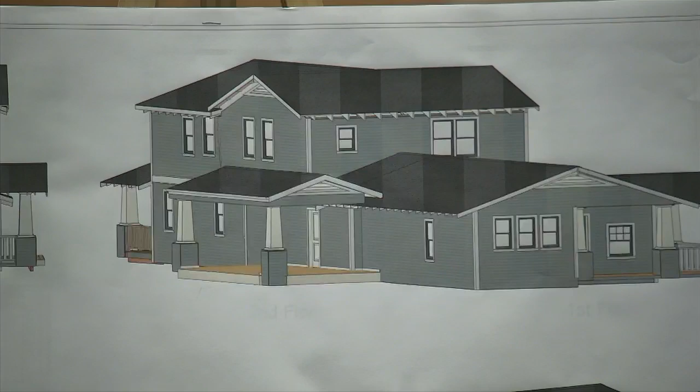Upside down -- this is the wall we're talking about. This is a shower, their laundry room, and a kitchen, and then it jumps back into the living room, which is an existing wall here. So I don't know if I could add any windows in a...

That new wall runs from the ground to the roof line, correct? Correct, yes. So you will have trim pieces at both of those bottom corners, this corner here and this corner here, that will run all the way up. Correct, yes, that's what we're asking. Oh, I'm sorry, I misunderstood. You're fine.

Any additional questions? I do have one respecting this access door into your laundry room. Now at this point where the porte cochere is a moot point, would you consider putting in some sort of an awning or a covering over that door to protect it from the weather? That would be beneficial, yes.

I saw earlier on the gentleman's presentation at the first one, the modern one, that he had an overhang about 6 feet off. Is that acceptable? I don't know, but if it's within your setback, that's not an issue, as long as the characteristics of it match the house building. We wouldn't want to put a modern metal canopy on this. I can't imagine why.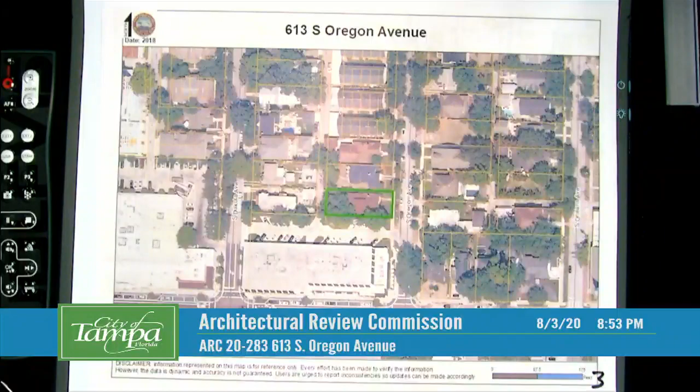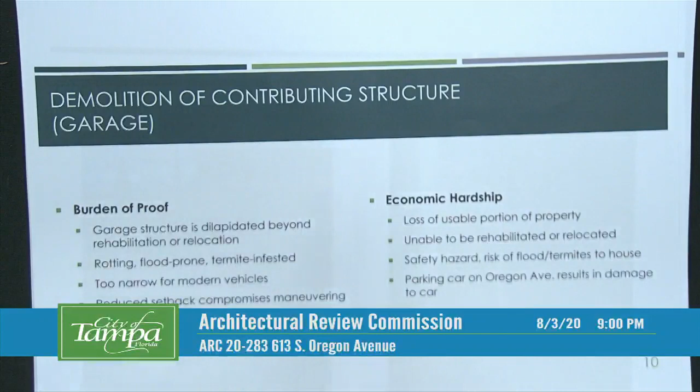So with respect to the demolition of the contributing structure, the burden of proof, I think, is best met by a visual kind of photo essay, if you will. But the most important part to understand is this garage structure is dilapidated beyond rehabilitation or relocation. It's rotting, it's prone to flooding, it's infested with termites. It's too narrow for a modern vehicle. I will show the measurements a little bit later.

It's kind of a parking space, if you will—like a compact parking space. You can't open your doors, you can't load, you can't let your dog in the car. You can shimmy out of the car, but it's nothing you'd want to use as an actual garage. The existing garage structure's setback is almost all the way up against the boundary line, so as you'll see in some of the photos later, that makes it really difficult, if you even could park in it, to maneuver out of it because of its proximity to another structure on Miss McElhaney's property. It creates a blind spot, so it's really pretty non-functional as a garage.

As far as the economic hardship, in the interest of time, we submitted into the record on Accela a full assessment of the criteria, but I think the most important thing to focus on is that this is a loss of a usable portion of the property.

Clearly, it's intended to be a place for the homeowner to park their car. That's the place where you would park your car, but you can't. It can't be rehabilitated, it can't be relocated. It's a safety hazard. Not only is it expensive to keep it from falling apart at this point, and to keep the flooding and the termites at bay, but those are also a threat to the primary structure. So it's not only a threat to itself, but it's a threat to the home as well.

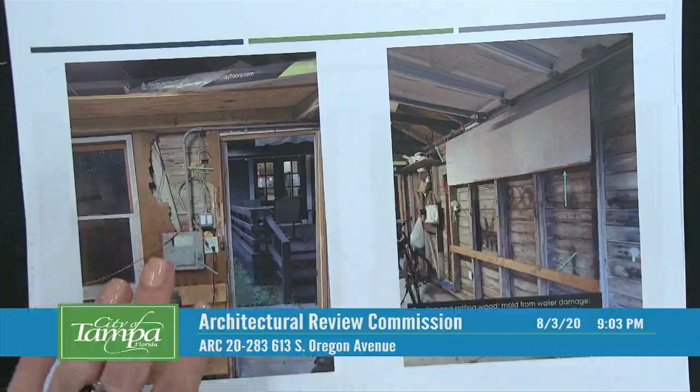I measured it. There you're losing some wiggle room for the entire car. So here's the width. It's big enough to fit a bike and an inflatable shark on a chair. It's just over 9 feet in width. I also measured it, and you can't open your doors fully because of the fact that you're losing a lot of the wiggle room with these little things here.

So we are fairly sure that this garage structure meets the burden of proof for why it should no longer exist. It also doesn't even look like the rest of the house, and you'll see in our materials that we're proposing for the new construction, it's going to look just like the house. It's actually going to have the craftsman style features that the house has, whereas the existing structure is yellow, doesn't match the color of the house, doesn't have any nice architectural features, and the roof isn't even the same.

So as I'll show you in the materials that we're going to use later on, we're going to have a much nicer structure in its place.

So I've zoomed in on the site plan here, although I'm going to show the whole site plan later, but just to avoid confusion, you can see the outline of the existing structure here, which is getting removed. You can see how close it is to the boundary line. We're going to have the required 3-foot setback with the new structure, and we're also going to have the transportation code required 10-foot back out room.

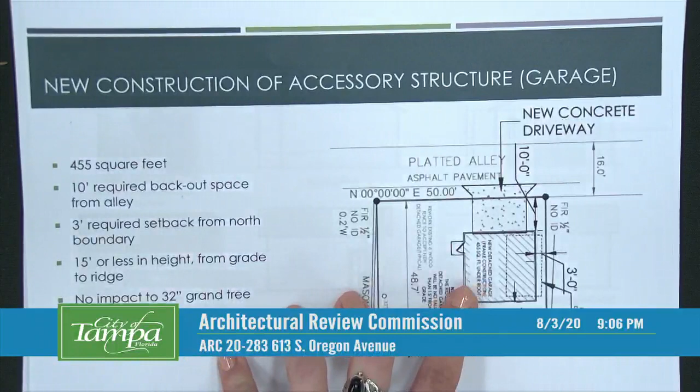So not only are we going this way, but we're also going to have this required back out room, so it's going to be a functional garage, functional driveway. The structure itself is going to be 15 feet or less in height from grade to ridge, so no design exceptions required there. Everything is to code, and we've had confirmed from Natural Resources there's no issue with the 32-inch grand tree on the southwest side of the property.

I'm going to discuss the materials in connection after I discuss the new addition to the primary structure, the laundry room, because it's going to be the same siding, same trim and everything. So I'm just going to talk about that at once.

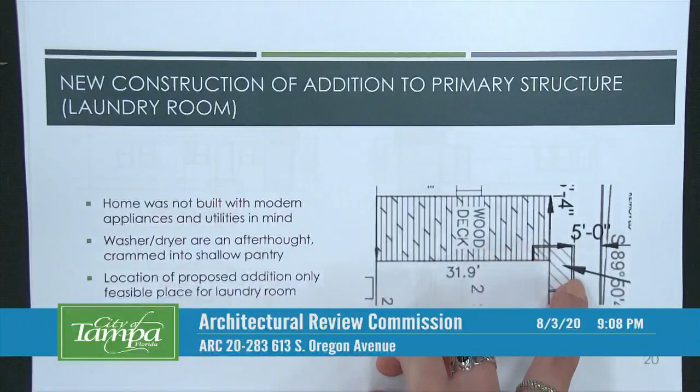So this is part of the site plan where we're going to be adding this laundry room bump out. The home, as John pointed out, was built in 1921. I don't know if they had washers or dryers back then, probably not, and they certainly wouldn't have contemplated the big washers and dryers that we have now in our homes.

So the current location of the washer and dryer is an afterthought. They're stacked, crammed into a pantry. I've seen it, it's in the kitchen. No offense, Cindy, it's really weird. And there's no room for folding. You have to take the laundry out, set it on the bed or on the kitchen table or wherever you like. There's nowhere to store an ironing board or anything like that. So it's really not conducive to doing laundry.

I think that probably when she bought the house, that was sold to her as the laundry room, and it's not, it's a pantry. The location, as I'll discuss later, especially in respect to the variance, the location of this proposed bump out for the laundry room is the only feasible place in the house for the laundry room for a number of reasons, including the grand oak in the southwest corner of the property.

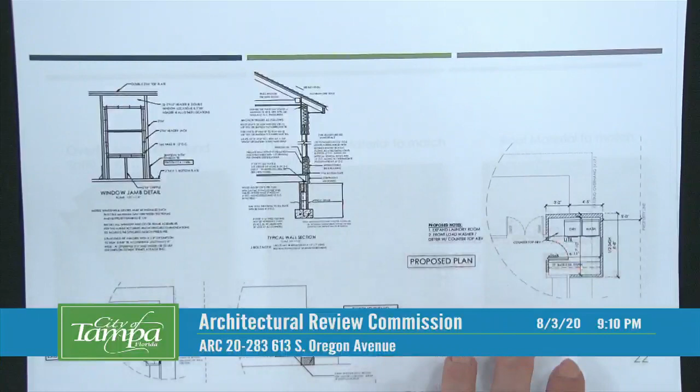So again, wall sections. Here's the pantry that she's currently got the washer and dryer shoved into. The actual size of this bump out is going to be 47 square feet total. It's very small, pretty much the minimum you'd want for a laundry room. There's room to walk in, turn around, fold your clothes, use the dryer and washer, but that's about it. Part of what we're proposing is within the existing footprint of the house.

For the materials, I've mostly taken photos of the existing house because it's going to match both the garage and the laundry room addition. So you're going to have exposed rafter tails on both, which I think is going to make the garage look way better than it does currently. Rafters and soffit, all of this is going to be the same. We're going to use HardiePlank, the Colonial Smooth siding, in a color that matches the house for both the garage and the laundry room. The roof material is also going to be the same, this dimensional shingle.

Actually this is the bump out on the other side, so this is kind of like what the bump out's going to look like, where you've got the different direction for the roof where they connect.

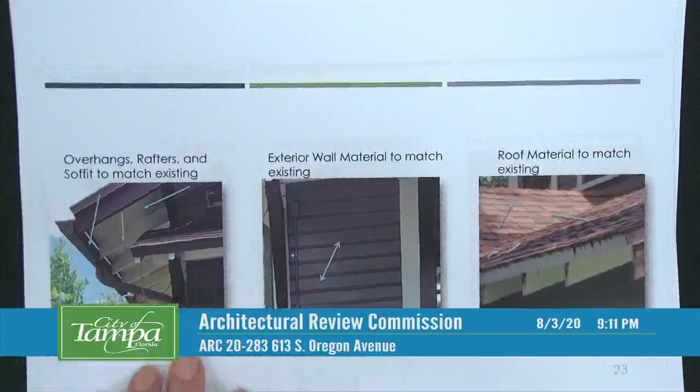The only window is the one that's going to be on the north elevation. It's going to match the existing windows, double hung, same trim. Trim everywhere on the additions and in the garage is going to match the existing, just going to be HardieTrim. The foundation for the bump out will match the existing foundation. This is actually the foundation on the corner of the house that the bump out is going to come out of, so this is a good place to show the foundation slab on grade.

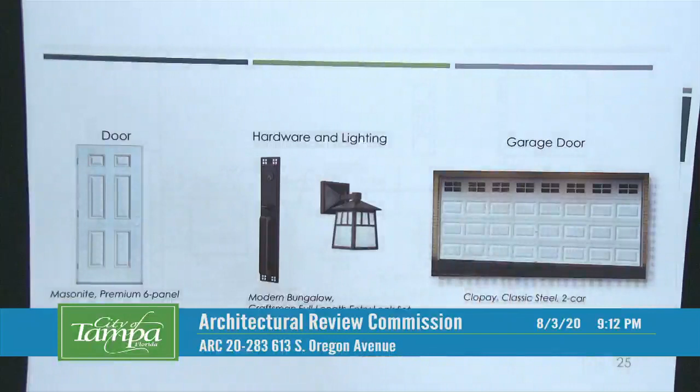This is for the garage specifically. It's going to have a 6-panel door, white, Clopay classic steel 2-car garage door. It's got nice window features. I think the other garage door didn't have anything like that, but this is kind of a Craftsman style. The hardware for the door and the lighting are only going to be on the garage, not on the laundry room bump out. These are just for the garage, and they're Craftsman style as well.

I'm going to pull this to the side because this is helpful to have.

So I'd like to discuss the variance, which is, you've seen this photo before. The variance is for the bump out, reducing the north side setback from 7 feet to 5 feet to accommodate this part here. This is the only place on site, and I'll show you the site plan to show you what I'm talking about. But I also would like to point out that Ms. McLaney, who is the only neighbor who would be directly affected by this variance, has expressed her support and has written a letter to express her support. It's very short, so...

She's reviewed the site plans and the drawings, and she supports the project, including the variance. As I'll show you in the photos, she's completely buffered by the existing fence. So the goal of this variance, the goal of this laundry room, is to modernize the interior of this home while preserving the historic character and the historic exterior to the maximum extent possible, and in fact enhancing it and being consistent with the existing style of this particular house.

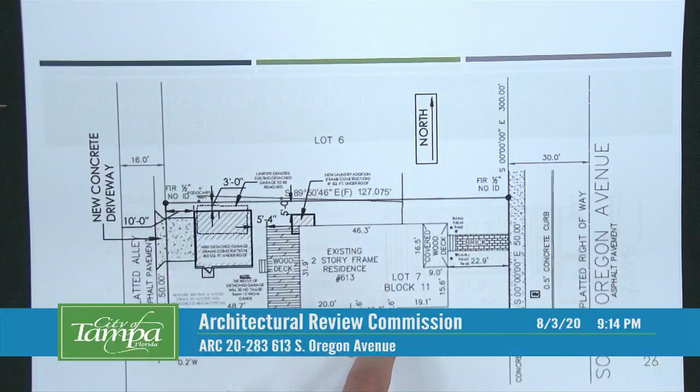The existing laundry area, as I pointed out, is an afterthought, but this is the only feasible location because, one, that's where the water hookups currently are, and two, more importantly, there's a grand tree here whose canopy expands around pretty much this entire southwest portion of the property. So even if we could put a bump out here, it could start butting up against that tree. Also, even if the tree wasn't there, the AC pad and other mechanical equipment is on this side of the house. And here is the existing bump out, which is also very close to the concrete barrier on the south boundary. This shows that it's within the character of this particular house to have a bump out, and it's also within the character of a Craftsman style home to have that.

And to have here the reduced setback, just like what we're proposing here. In addition, with the wood deck, we wouldn't want to put it here because then we would have an irregular layout, and we would encroach into the character of the deck, which is a very nice feature of the home, and it's a very classic, historic feature of the home.

This is not going to adversely affect any other historic properties, in part because it's going to look good and be within the character of the district, but also because of the fence buffer. So you've got the buffer from Ms. McLaney's home, the neighbor, and then in the front, facing Oregon Avenue, there's also that fence. So anybody on the right-of-way is really not going to be able to see the bump out because it's towards the back of the house, and there's a fence, which I'll show you in a photo.

It's designed to complement and be consistent with the character of the home. It brings the home up to modern standards while maintaining the character, and it's minimal. It's 47 square feet, and as I said, a large portion of it is within the existing footprint of the home.

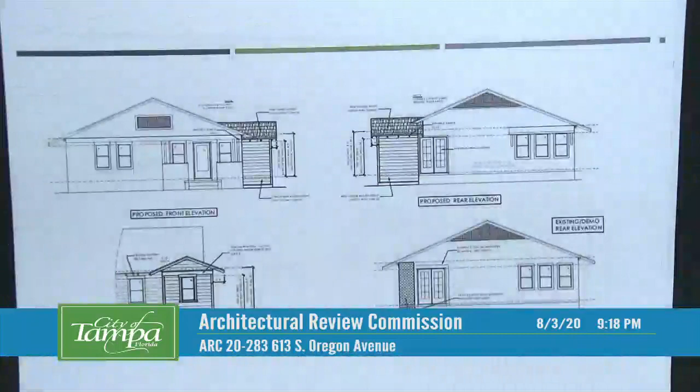Well, that's all I got. Could you go through the variance and hardships just for the record? Thank you. Do you want me to read them out? Because I went through some of our answers to them, but do you want me to read them out by title? Yes, if you could just go through the six.

Sure. Okay, number one, the alleged hardships are unique and singular. So as I said, the home is a contributing structure. It's been well preserved, but from a layout perspective, it's not configured with modern appliances in mind. The only location on the property where we could put this is where we have proposed it, because there is the grand oak tree in the southwest corner, which takes up a large part of that.

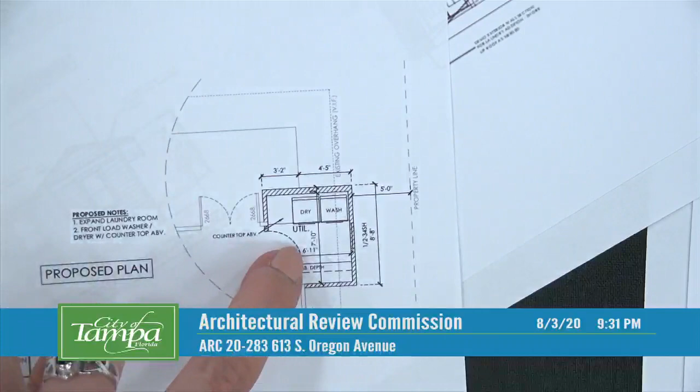Okay, thank you. Again, it's very small, and we're using the footprint that exists, but it's kind of the minimum that she could use as a laundry room. I've seen houses with whole rooms as laundry rooms, and this is more of a laundry cubby where you walk in and turn around. I think it's the functionality of it, to have a room where she can fold clothes, do everything like iron, turn around, take things out of the washer and dryer. It's just for functionality's sake.

None of that is going to be on the record. If there's anything you would like on the record, please come up to the podium. Otherwise, we can't hear it or include it. Do you have an existing floor plan of the first floor? I don't think we do. Do we have an existing floor plan? No, I don't think so, we just have the site plan. If you'd like, I can describe it to you.

Are there any other additional questions? Okay. At this point, the applicant is allowed five minutes for rebuttal for the variance portion. We'll close this portion of the public hearing, and the commissioners will now discuss the variance portion of the case.

Again, I think this is more of a convenience factor than a hardship. I definitely understand that with older homes, some of the modern conveniences are a little challenging, but I do think on the site they have other opportunities to place a little pop-out within the setback. So I would not support this.